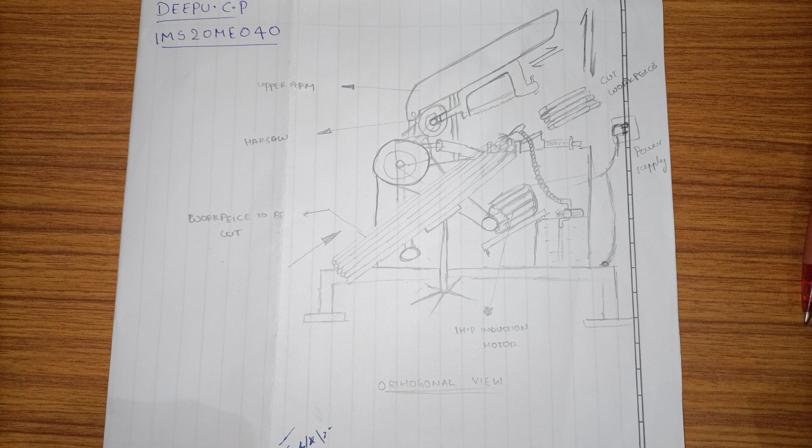Let's get started. This is the orthogonal view of the power hacksaw cutting machine. It is nothing but a hacksaw which is driven by a motor with the help of power supply.

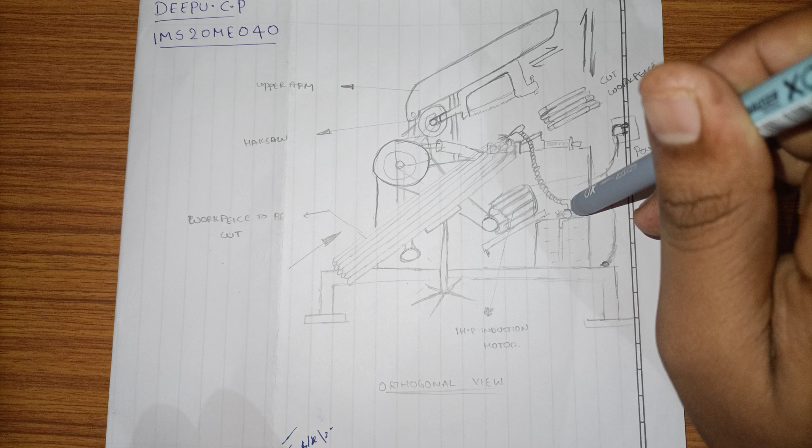Now coming to its parts, it consists of the upper arm, induction motor, coolant tank, a small motor to pump the coolant, hose pipe through which coolant flows, and the frame which holds the workpiece and the saw.

Now coming to its working procedure, it works on the principle of conversion of rotational motion from the induction motor to the linear reciprocating motion of the saw. Let's see this in side view.

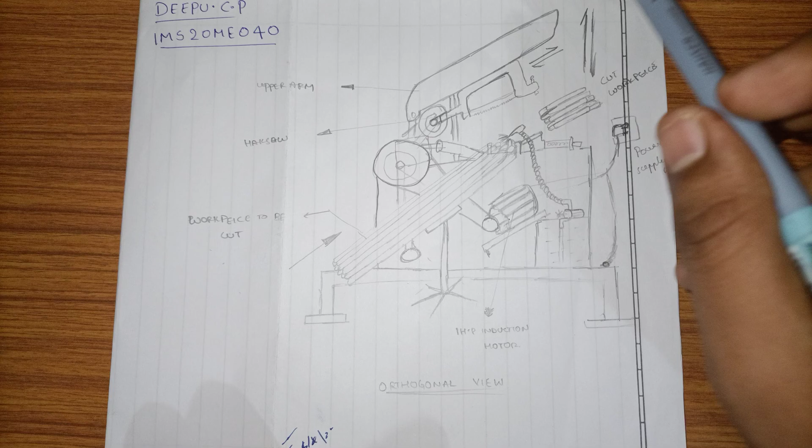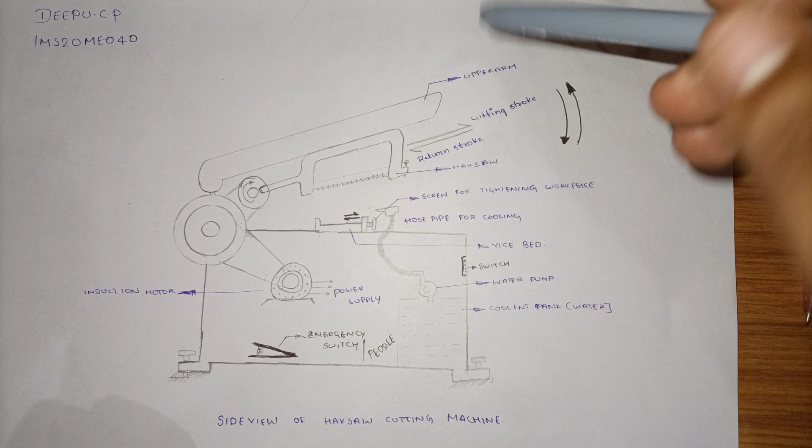This is how it looks in side view. Here the parts can be seen clearly: upper arm, the flywheel, induction motor, small pump which pumps the coolant, storage tank, hose pipe, and the jet

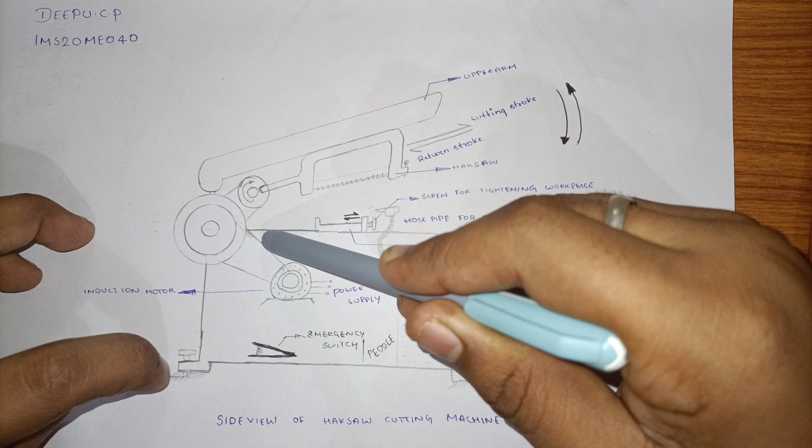which sprays the coolant, the hacksaw, the auxiliary pulley, the belt which drives the pulleys, the bolt which holds the machine firmly on the ground, the emergency switch pedal, and the hinge which helps in movement of the upper arm.

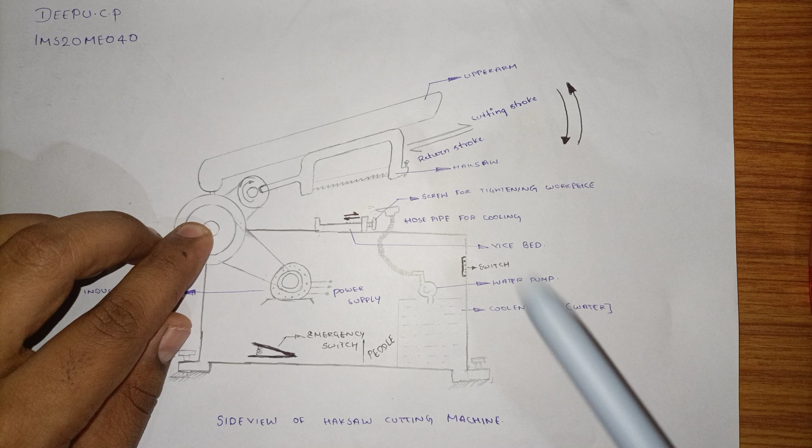Now coming to its working, when the power is switched on, the rotational motion from the induction motor is transferred through the main pulley on which the flywheel is mounted.

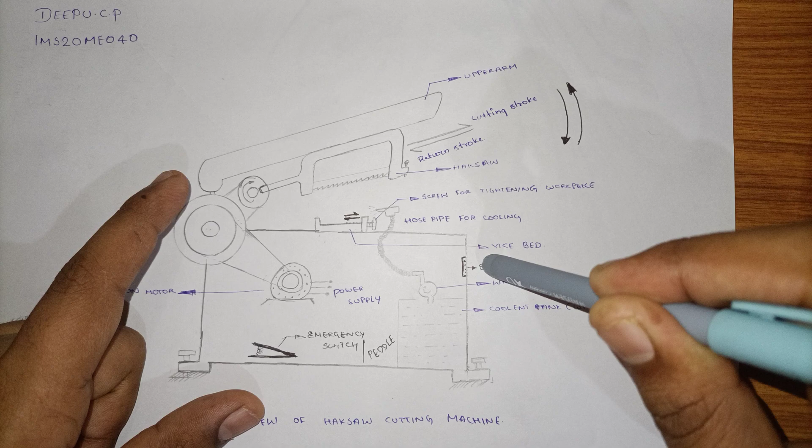This pulley transfers the same rotational motion to the auxiliary pulley on which the link of the hacksaw is mounted. When the auxiliary pulley rotates, the rotational motion is converted into the hacksaw's linear reciprocating motion.

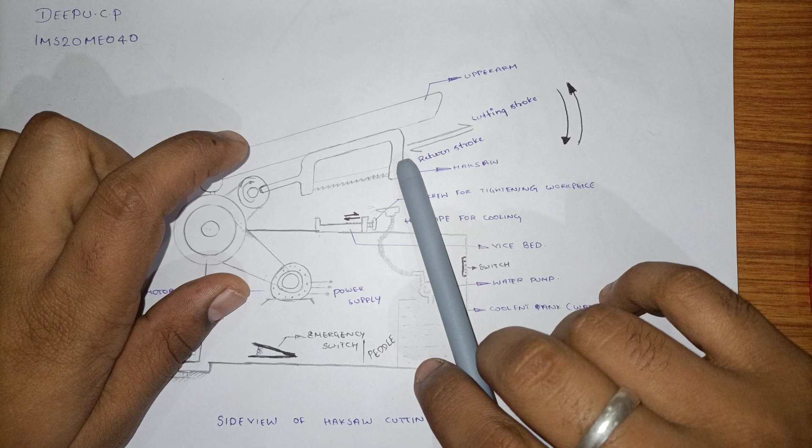During the forward stroke, it cuts the workpiece. During the reverse stroke, it does not do any operation.

The workpiece is fed into this stage, also called the bed or vise, on which a screw is provided to firmly mount the workpiece.

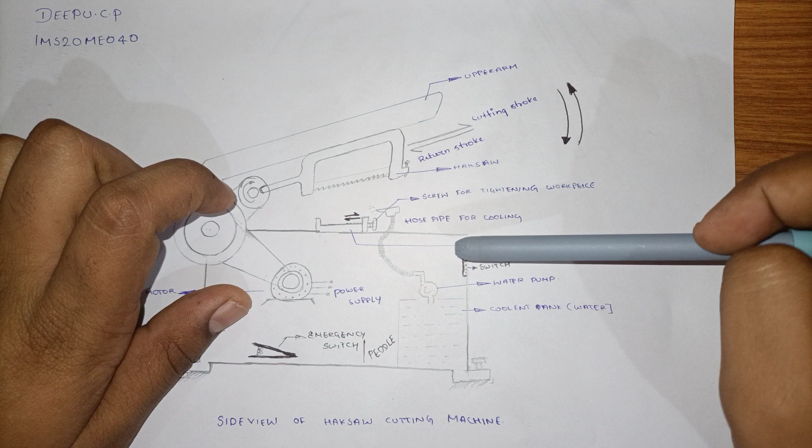Once the workpiece is mounted firmly, the upper arm is pressed against the workpiece and the switch is turned on. The speed of the induction motor is around 1440 rotations per minute.

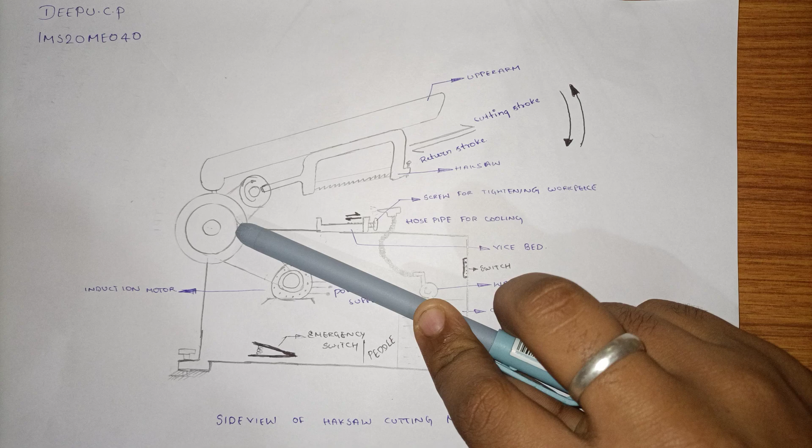The same is transferred to the flywheel. The flywheel is used because during the return stroke it needs some momentum, so it provides the necessary momentum.

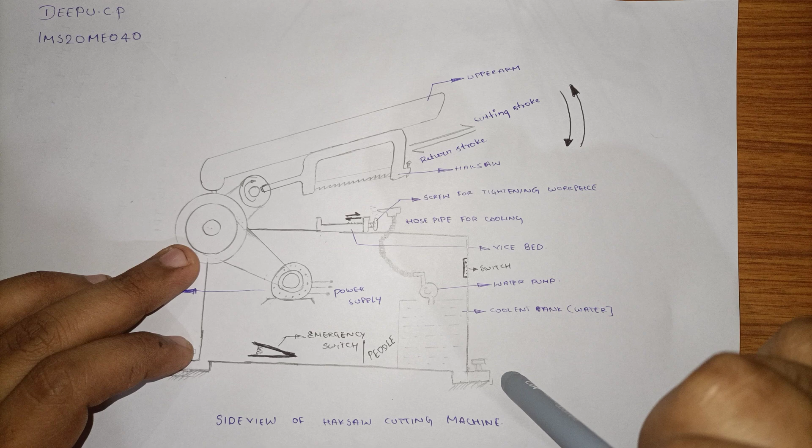During the whole operation, the machine is subjected to high vibration due to the hardened workpiece. Sometimes to avoid that, the machine is firmly grounded with the help of bolts, and an emergency pedal or switch is also provided on the machine which helps in stopping the machine at any instant during an emergency.

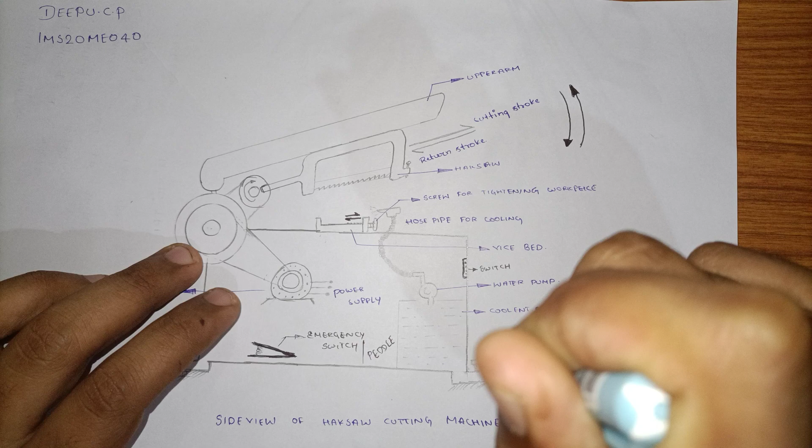Now coming to its working, when the same is transferred through this saw, pressing it performs the cutting operation. During this operation, which is taken at around 1400 rpm, the metal workpiece gets heated.

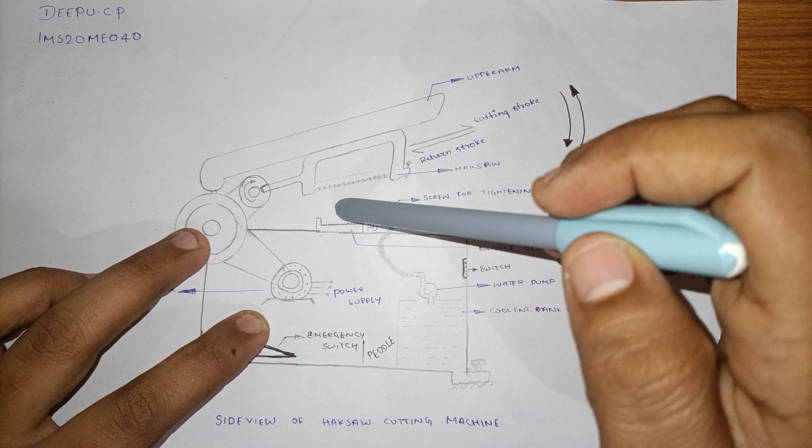Due to this heated workpiece, it can damage the tool, so use of coolant is necessary, preferably water, because it has high specific heat capacity.

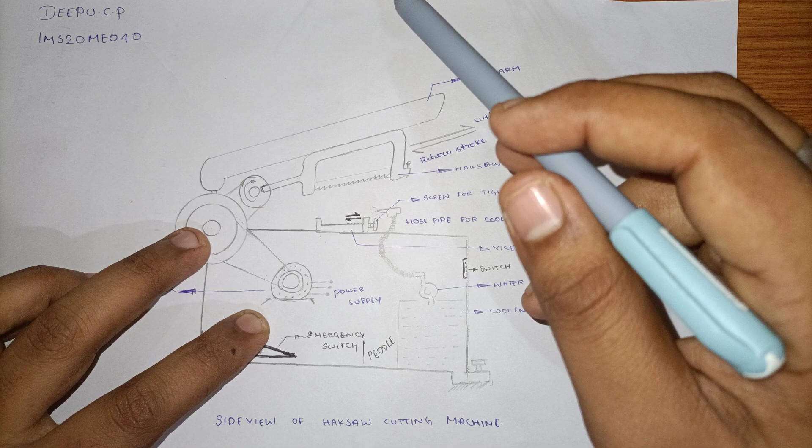After the operation, the upper arm is moved back again to its position, and the workpiece is moved again to the place where it needs to be cut, and the same is repeated.

Now coming to its applications: it is used in cutting piles of billets or rods where hand cutting may be difficult, and cutting high gauge material where hand cutting is time consuming and labor oriented. Through this we can conclude the applications.

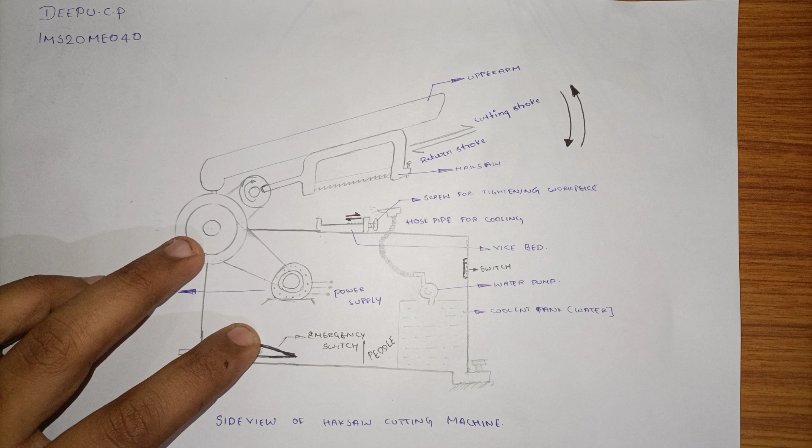Now coming to the limitations, every machine has its own limitation. Likewise, the limitation seen in this machine is that the workpiece should always be controlled

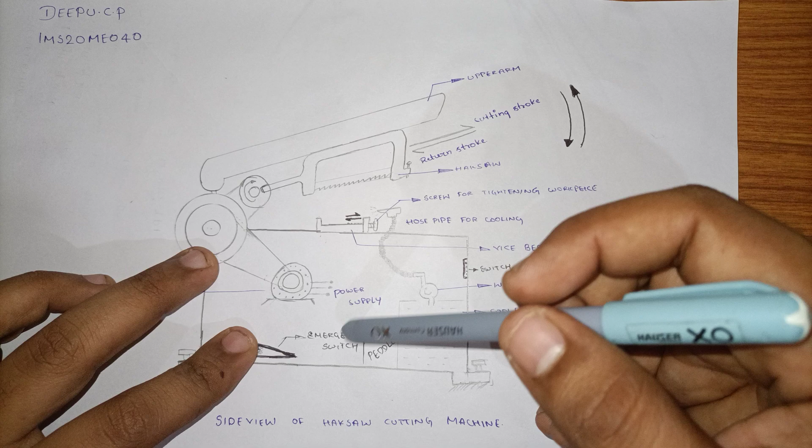manually, because after each cutting operation the workpiece must be loosened, moved to a new position where it must be cut, and again tightened on the bed, and the same operation must be repeated, which involves a little bit of time, but it's still a limitation. Through this I conclude this.